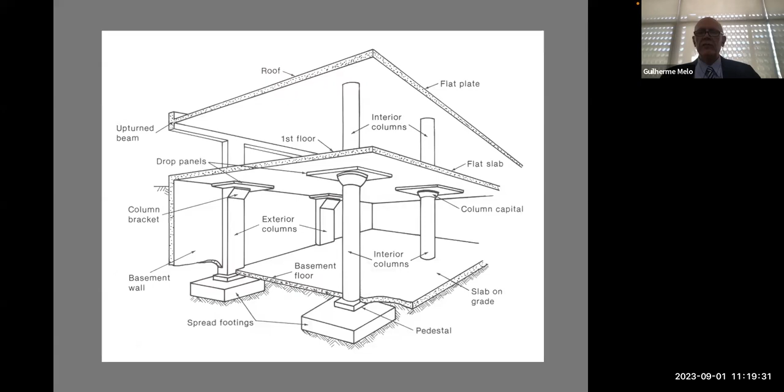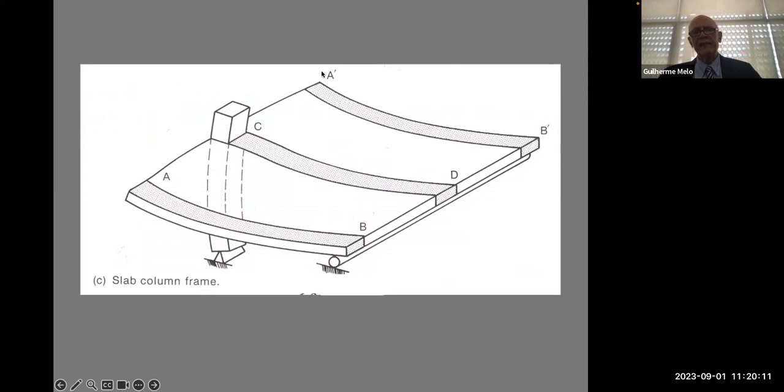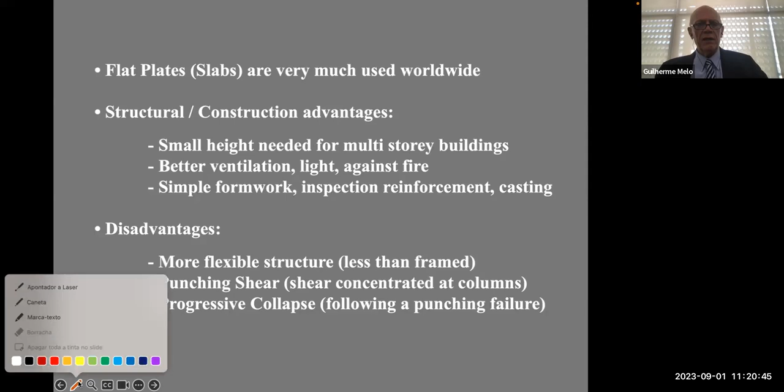Flat plates, flat slabs are very much used everywhere. They have a lot of structural and construction advantages: small height for multi-story buildings, better ventilation, light, simple formwork, they say, and it is more easy to have reinforcement before casting. Some disadvantages, of course: it's a more flexible structure compared with a frame, for example, and has the possibility of a punching shear failure.

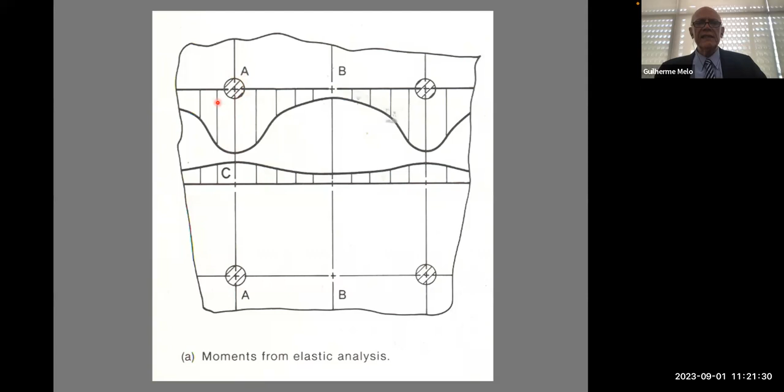And because of that, we can have some progressive collapse following a punching failure. Because of that, we should take extra care. Here is our flat plate. We are concentrating in this region here. And of course, you know, big moments in this region, and at the same region we have a big shear force. Then because of that, we can have a punching failure.

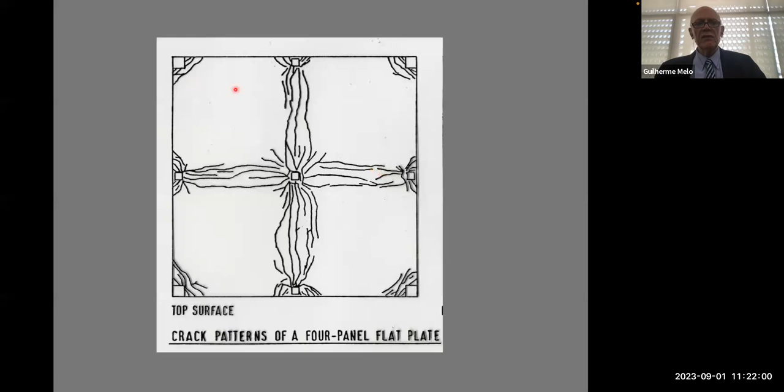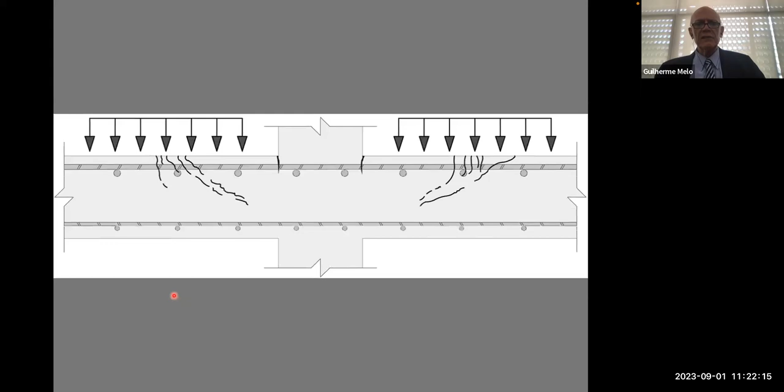This is a crack pattern from the top surface of a 9 column slab. We can have some cracking in this direction, close to the columns as well. And here we are concentrating in this region around the column. What happened basically with the loading, we have some cracking, going till failure here. And what you can see, this reinforcement here, the top flexural bending reinforcement, is very easily taken out here. And if there is reinforcement here, it can work better.

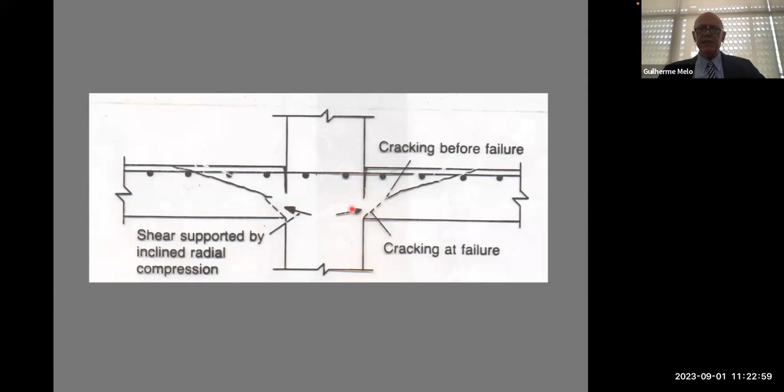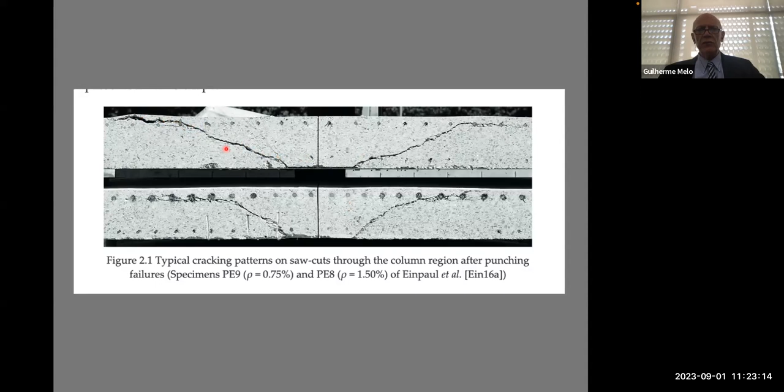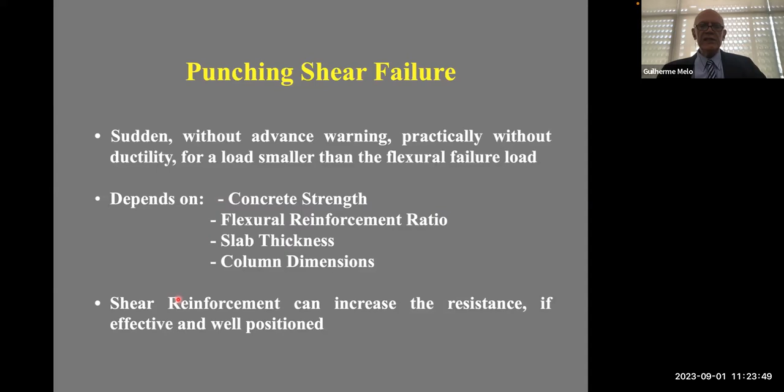Because of this, we have to saw-cut the slabs, let's say, when it's possible. Then a punching failure is sudden, without advanced warning, practically without ductility, and for a load smaller than the flexural failure load. It depends on the concrete strength, depends on the flexural reinforcement ratio, on the slab thickness, and on the column dimensions, of course. Shear reinforcement can increase the resistance if effective and well positioned.

Here is a model from more than 60 years ago, Kinnunen and Nylander, a very nice model. But of course, there were others. But until today, everybody's trying to find a good model for punching. This is a big conference from 20 years ago in Sweden.

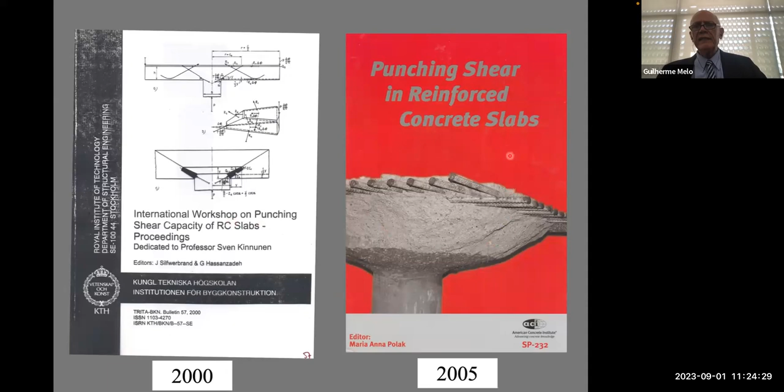Kinnunen was there participating and so on. Very important conference. Then another one in the United States, at an ACI meeting, 2005. Then another very important conference in 2017, another special publication at the ACI, honoring Professor Hawkins.

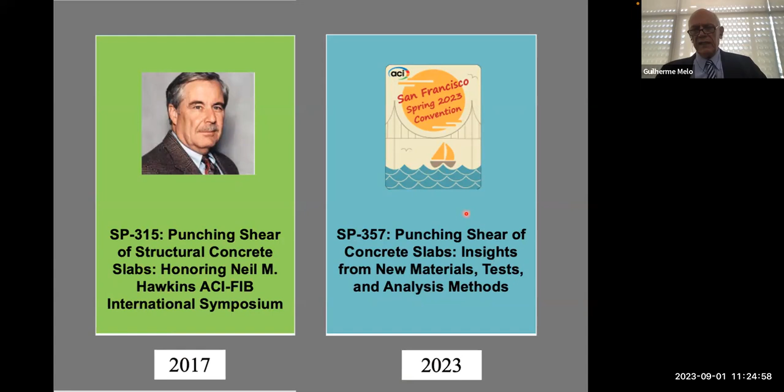Shear reinforcement - what would be the ideal shear reinforcement? Of course, effective and requiring simple and easy workmanship. Some are effective but very difficult to install. This is always important to keep in mind: not all of them are effective, nor simple, nor easy to work at the construction site.

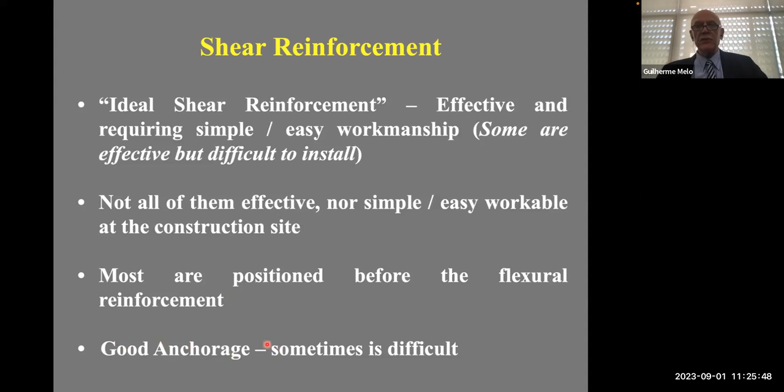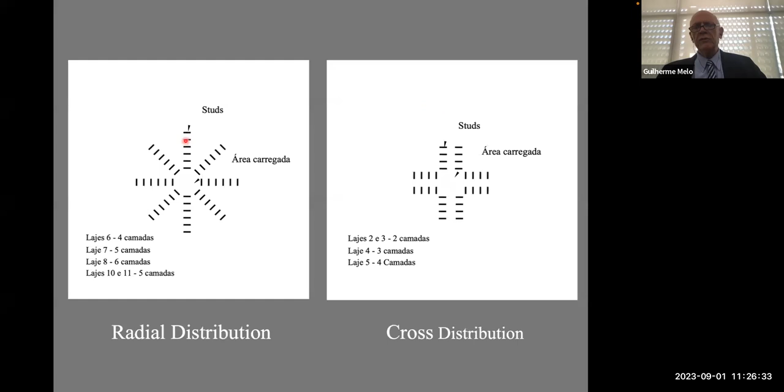And should have the correct length, let's say. Here is an example of well-anchored shear reinforcement. Of course, it can be in cross or radial distribution, with an advantage for either one.

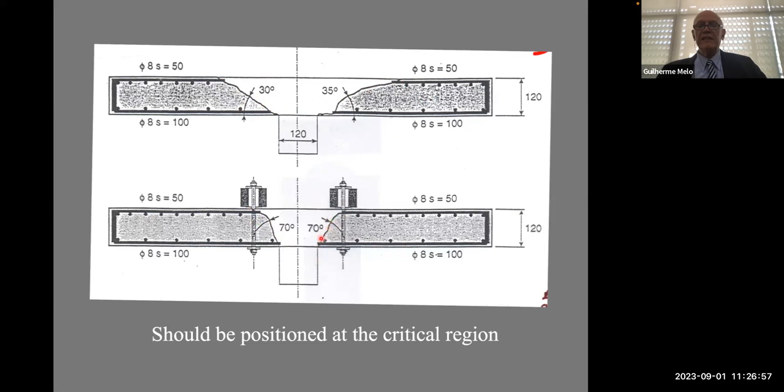What happens, of course, when you put shear reinforcement versus without shear reinforcement, is the angle of the failure surface changes. If you have, for example, a strengthening here, that would be the difference in behavior - for a higher load, but changing the surface. That's very important. Basically, we can have failure going through the reinforcement, and failure outside the reinforcement.

Because of that, all codes have a lot of checking. We should check at this surface if there's no shear reinforcement, at this surface if there is shear reinforcement - the failure could be here, could be here, or could be here. And because of this, we have...

Expressions for checking that. Interesting to note that sometimes the load you arrive at is good compared to the test you did, but the shear failure surface is not the one that was expected. On the other hand, sometimes the failure surface is what you expected from the test, but the failure load was not.

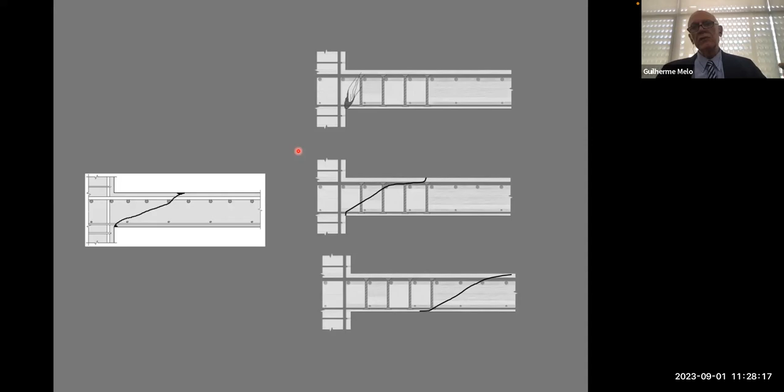In other words, we have to study much more, everybody, so that possibly in the future we can know exactly what will happen when the slab is tested.

Another important thing here would be for a circular column, how the failure surface itself should be. And of course, it's easier for us to use a vertical surface for checking stresses. We have to keep this in mind.

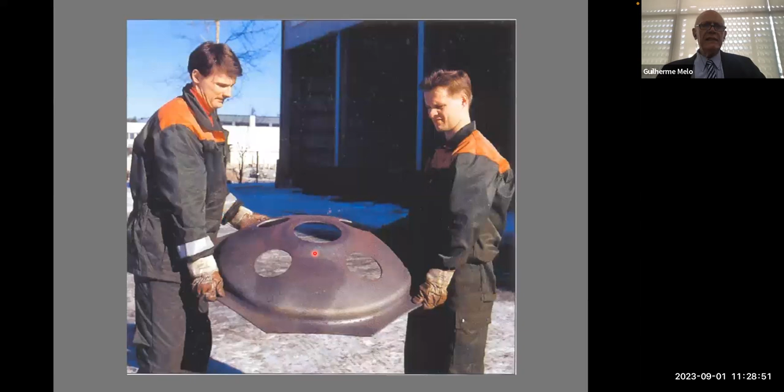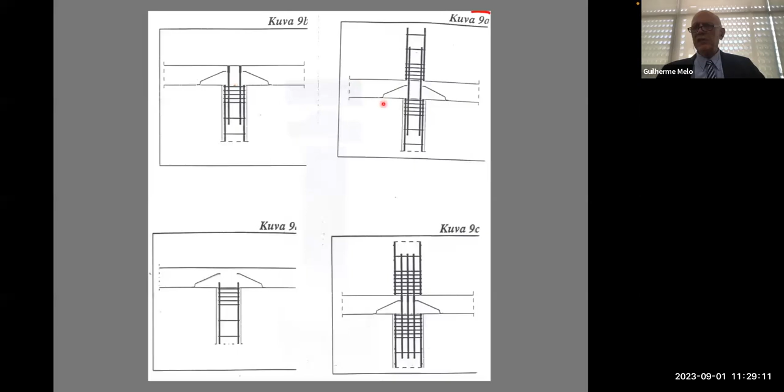Here, one interesting example from Finland is a kind of UFO, unidentified flying object, it looks like. It's important, but of course it depends on the size of the column - it will be more difficult to use. Here is the position of all the reinforcement, and it would need some necking here at the column, and all this should be kept in mind.

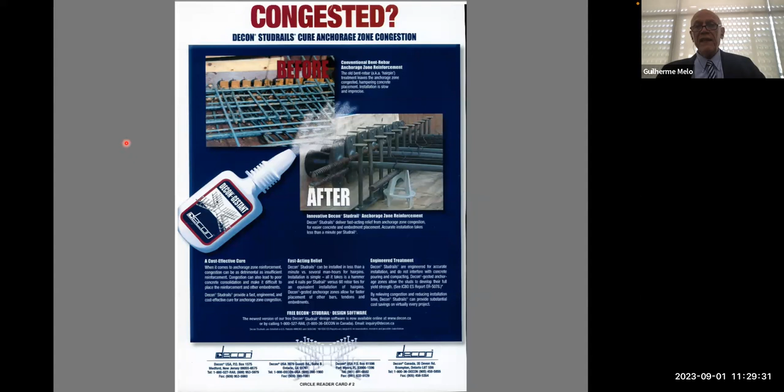And of course, this is business. Here are some adverts from Concrete International. And as we noticed, sometimes this region is very busy. Anything that can help, if it works well, could be good.

Another kind of shear reinforcement we can have - most of them, actually, to be sold, are tested and so on. We should use one that we have tested and believe works. Another one here uses shear studs, and that can work as well.

Then the more traditional ones can set a kind of standard, and say, oh, ours is best, and so on. That's very important - yes, when you believe, you trust.

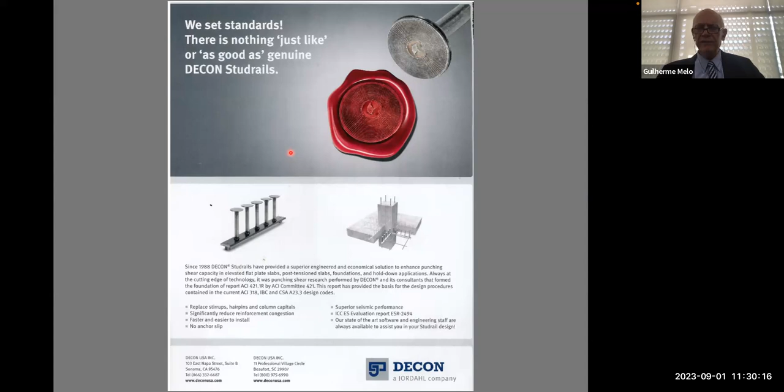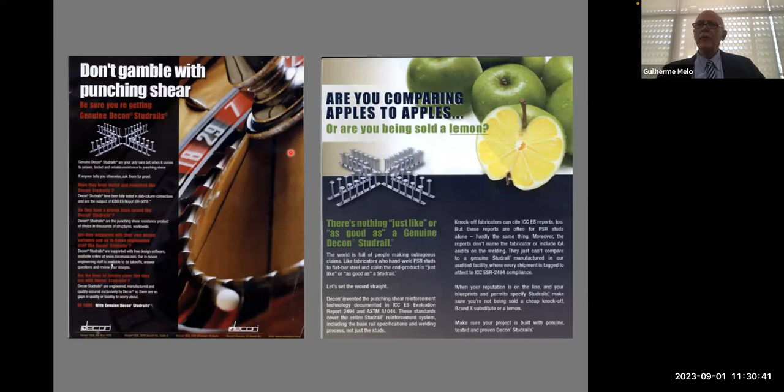And I like this, because we can't gamble with anything in structures. Sometimes people try to save money by lightening the structure, and that's not a good idea. If we want to save money, we should save elsewhere in the construction, not at the structure. The structure should be sound.

Another good thing is to think about post-punching and progressive collapse of slabs. Progressive collapse is the propagation of a failure that occurred originally at a small part of the structure, and the result is disproportionally bigger.

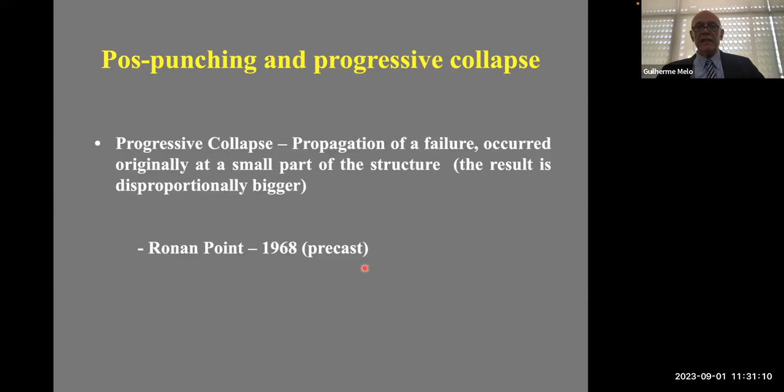One early morning, a lady was having tea. She hadn't noticed there was a gas leak, and then there was like an explosion. She was on the 18th floor, and all the kitchens came down because it was so early. Only 4 people died in this. I say that because if it had been 2 hours later, much more of a problem would have happened.

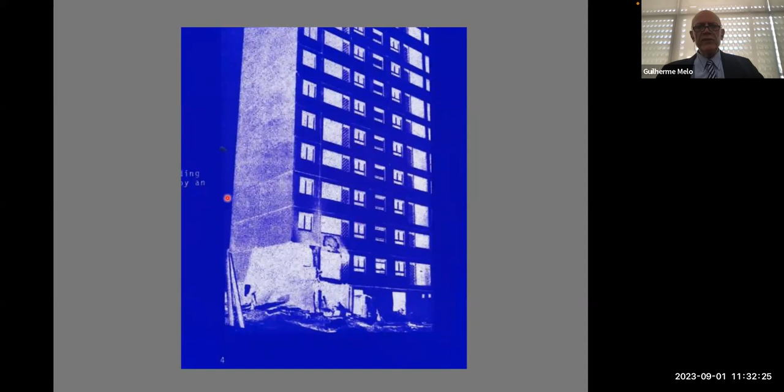Of course this is precast, and I like to show this because this was not gas leaking - this was a bomb. But the building could stand for some time, and that's important, of course.

And what are the most susceptible structures to progressive collapse?

Precast, as you have seen, and flat plates. There are a lot of examples here, some only from the United States, but we have examples everywhere. Everywhere that has problems can have progressive collapse. And we're going to show here...

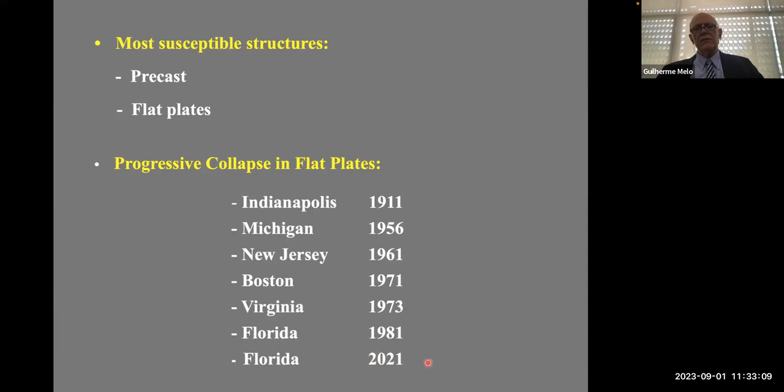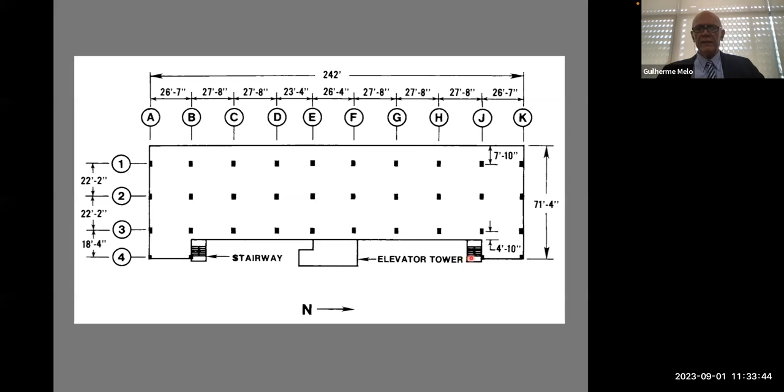This happened in 1981 in Florida, and of course there was one three years ago, very close to us here. In 1981, it was this one in Cocoa Beach, Florida, close to Orlando. This building was under construction, and it was a very well-behaved structure in a way, all framed, almost equal spans, with an elevator tower, staircase, and so on. There was a punching deficiency at one of the connections, found later.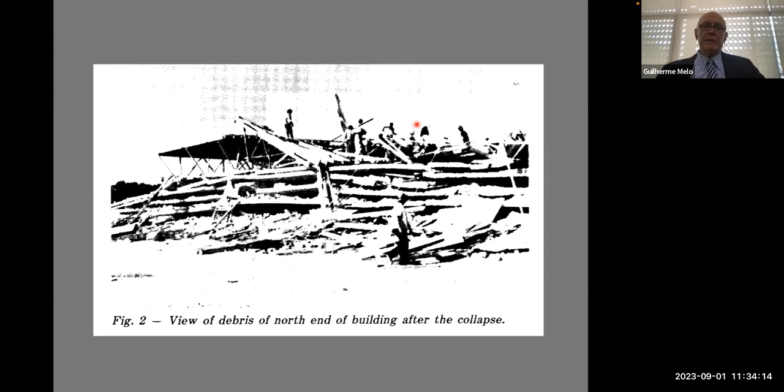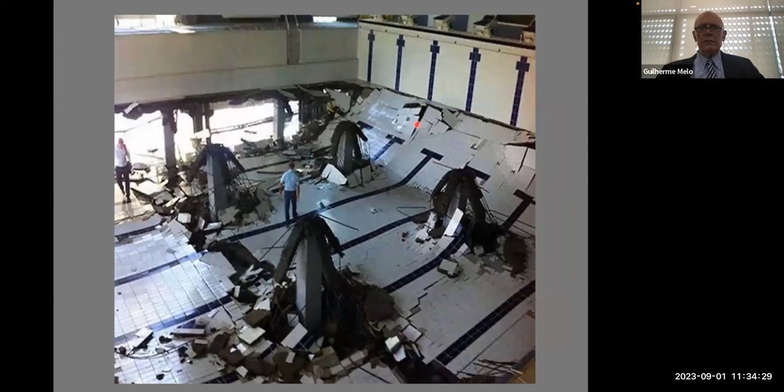And other examples of punching failures. You can see what's left usually from that. It was in Portugal, another example. All of those pictures I took from the internet. It's very easy to find punching failures and progressive collapses.

Another one here, you can see what's left after a punching failure. You can sometimes see a failure rupture cone here, and some bars just hanging.

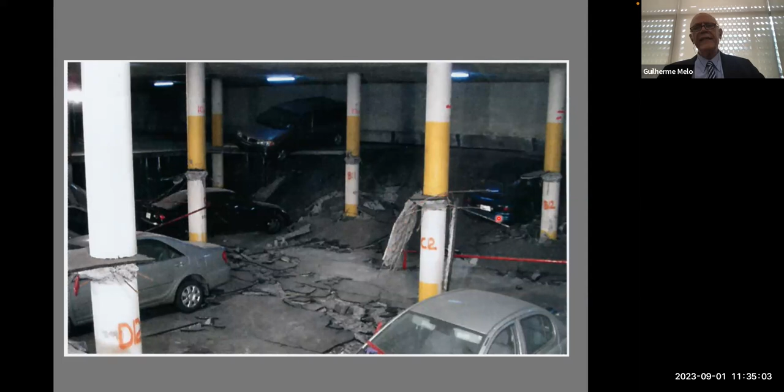What could trigger a punching failure and a progressive collapse? Of course, bad design, bad construction sometimes, bad detailing, insufficient punching capacity. Sometimes it happens at construction time, due to construction loads. The materials could also not be what was specified. And of course, overload. All of this can trigger it.

We know that most collapses, in general, don't have only one reason. Most of the time we have some punching capacity not at 100%, some construction issues, some deterioration with time.

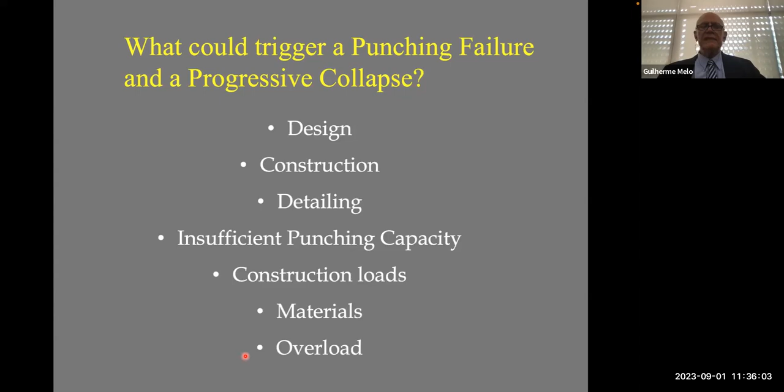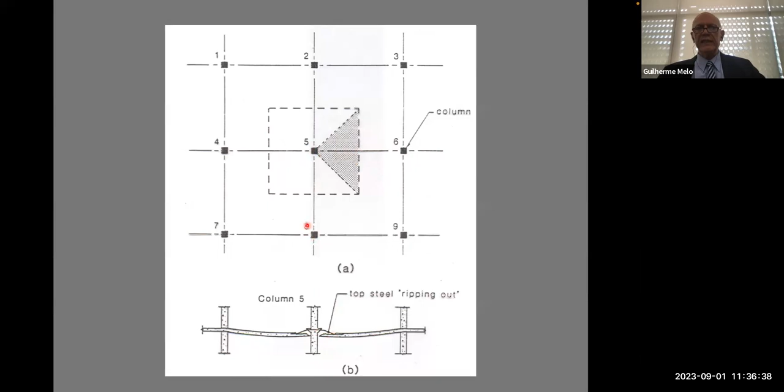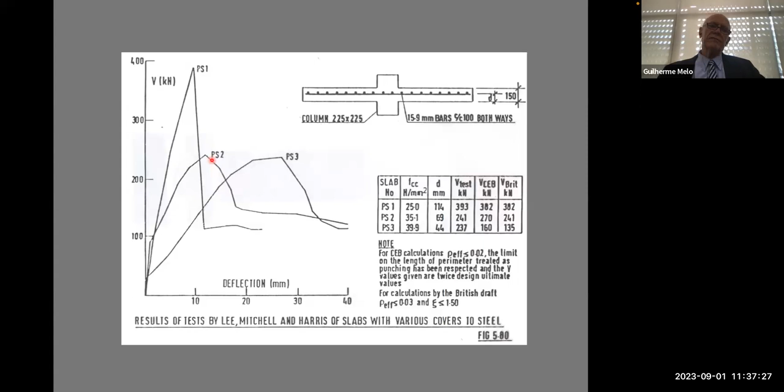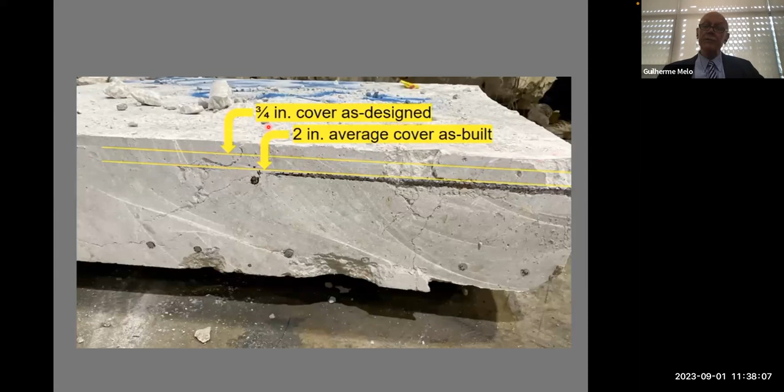Here is a more recent one, from three years ago, as you know better than me, which I found on the internet. Of course, they are still investigating, but this picture shows the cover as designed for the reinforcement, one of the bars, and this on average was much more than what was designed. Of course, this could be one of the reasons that helped trigger it.

What would be the aim of a structural design, as we know? Of course, to minimize the risk of a progressive collapse—in other words, containing the structural failure. We all want structural integrity, strength, ductility (important), and of course an alternative load path. Sometimes in some structures, you can even design for that.

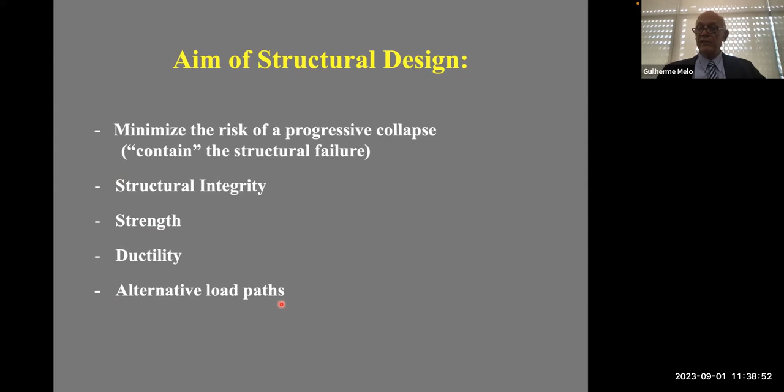What is the problem that happened here? There is an alternative load path, and this is important, because in some structures—would be for all of them—we don't want surprises.

What happens in post-punching in flat plates? As we have seen, post-punching resistance is low, with total or partial failure of the connections. Sometimes you can have 10% of the load still hanging there, 20%, or nothing, as we saw. Load and bending moments are transferred to neighbor connections, and horizontal and vertical propagation of the collapse happens. For flat slabs and plates, punching failure is usually the main cause, and it occurs with little or no warning.

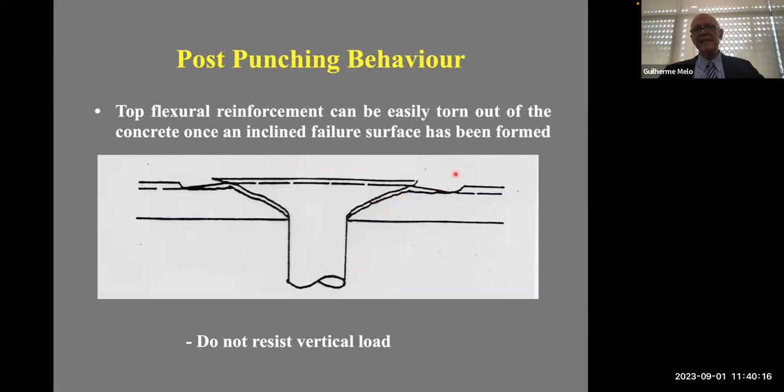It's very important to take care of that. In post-punching, the top flexural reinforcement can easily be torn out of the concrete once an inclined failure surface has formed. As you saw, this top reinforcement is vital for punching resistance and for the flexural behavior of the structure. After punching, it's easily torn out, as we saw, and it does not resist vertical load.

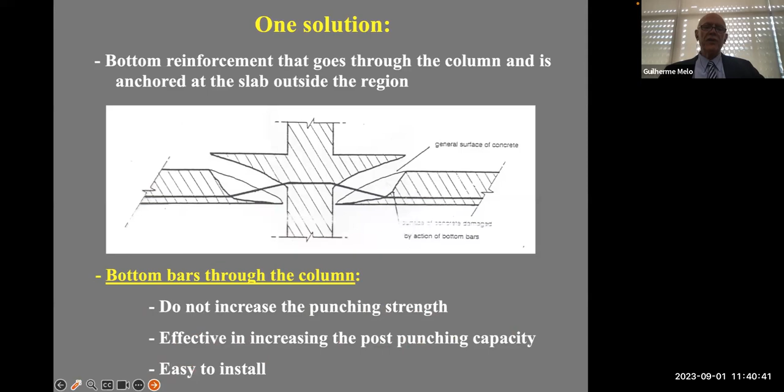One solution is bottom reinforcement that goes through the column, inside, and is anchored outside. These bottom bars do not increase the punching resistance, but are effective in increasing the post-punching capacity, and they are easy to install—easy compared to other heavy solutions.

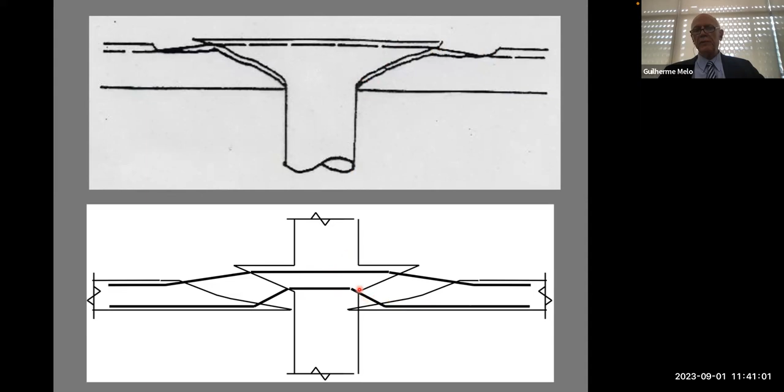We can see here that the top reinforcement is not good for post-punching, but the bottom reinforcement could help. This compares a slab without bottom reinforcement and a slab with bottom reinforcement.

We can have here, in this case, some 70% of the previous load. Sometimes you can have bigger values. And of course this is important because instead of all this load going to neighbor connections, we can diminish that.

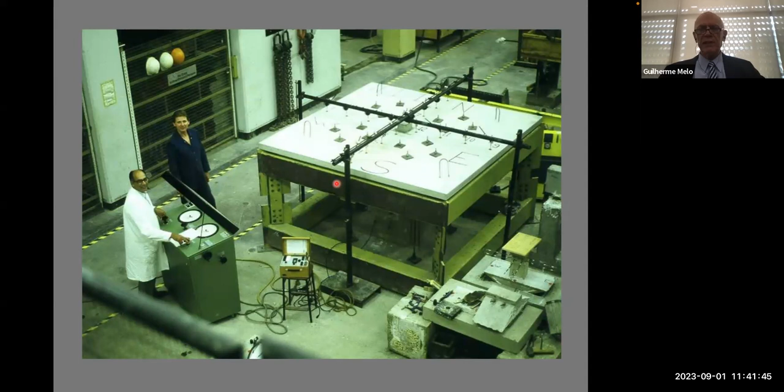Here is just a picture to remember the test I did more than 30 years ago in England, to try to understand this and help a lot of people in the world. We tested that, and you can see here the top reinforcement, out of position, and so on. Then let's talk a little about what has been done in Brazil.

I'm going to show first the FRP work, because I know most students here, Professor Nanni, are interested in that. We did some GFRP internal reinforcement beginning in 1997, some external bonded CFRP shear strengthening beginning 2000, near surface mounted beginning 2005, strengthening flat slabs in 2014, hybrid strengthening beams in 2014, and tried to find the resistant parcels of shear reinforcement later.

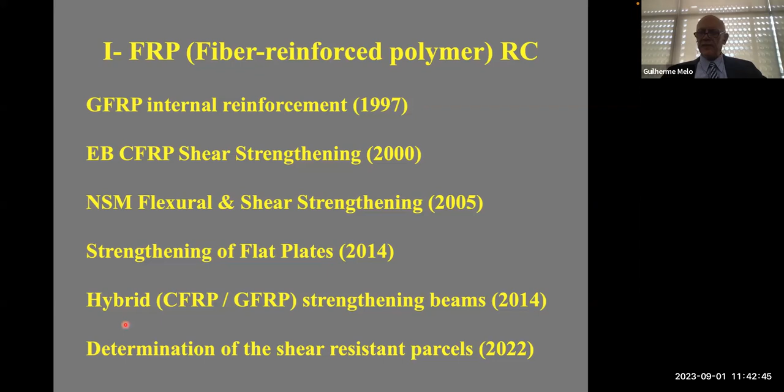I should acknowledge here a lot of people, because this was a guy very important. He had a company here in the United States and sent us a lot of GFRP bars in 1997. Then Professor Sam Rizkalla from North Carolina State University, he has been in Brazil and hosted two PhD students of ours, and sent at that time a lot of material we could test there.

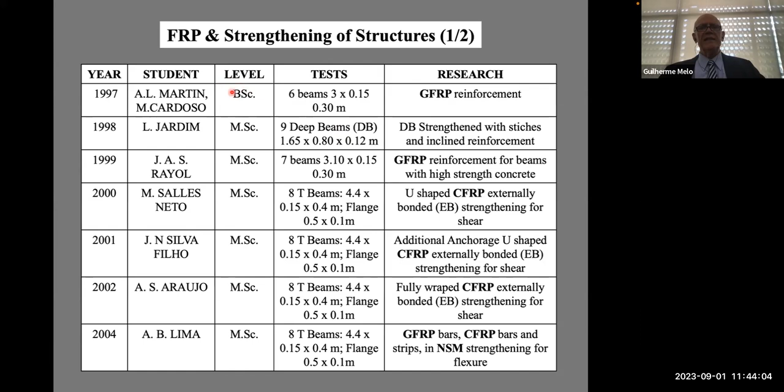This is some conferences I went to, in Structural Faults and Repair. These are the list of some of the works we did, beginning also with an undergraduate student, then some master students, then some PhDs, and so on, and the research they did.

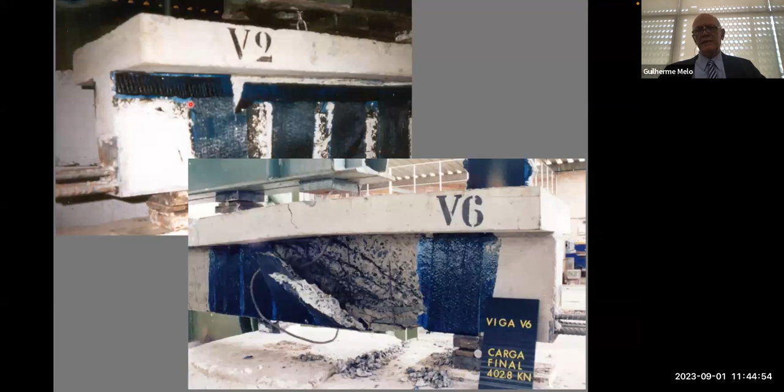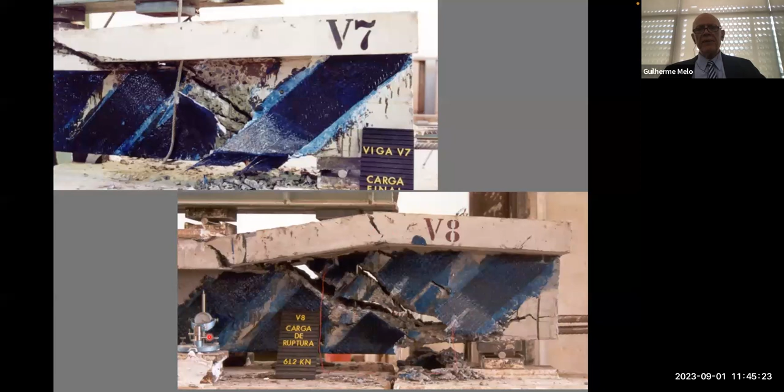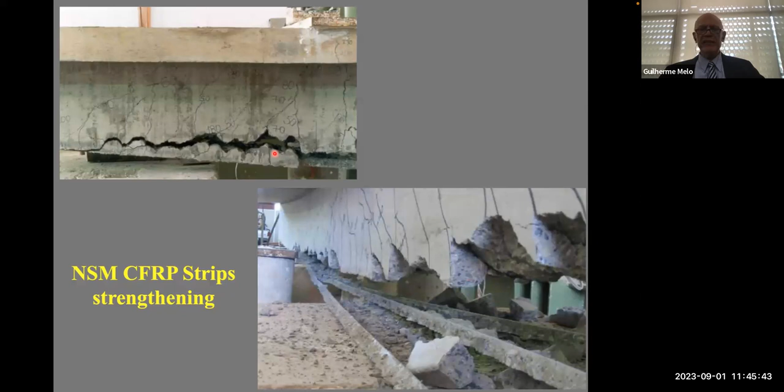Then we did some NSM with CFRP and GFRP bars, and so on. Here were some of the failures we had, for the CFRP strip strengthening, for the CFRP bars, and for GFRP strengthening. It's very interesting results, as you know. We have published most of these results.

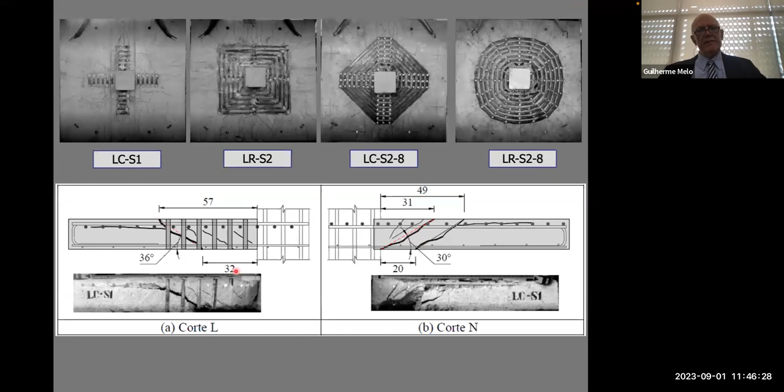And this flat plate strengthening with CFRP fabrics, yes, and this is some of the layouts we used. Here, two examples of the failure surface. And then let's show now some punching shear without FRP results.

That's actually what worked more. We did a lot in reinforced concrete with stirrups, shear reinforcement, rectangular column, openings, holes, unbalanced moments, etc., and some with pre-stressed concrete as well.

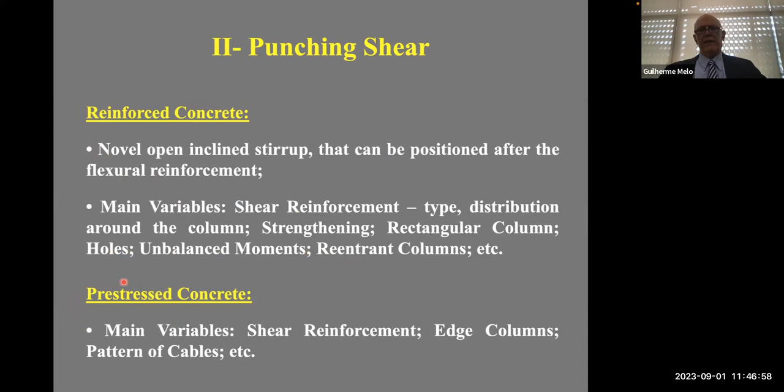We have here, of course, to acknowledge a lot of people, some internationals. Professor Paul Regan was my supervisor. He passed away unfortunately last year, and he helped us a lot. He went to Brazil many times and hosted four PhD students for a year. Most of the good ideas, let's say, were thanks to him.

I should acknowledge him. Professor Vollum from Imperial College hosted students as well and helped all these years. Professor Muttoni from EPFL in Switzerland, Lausanne, hosted one student there. Professor Miguel Fernandez Ruiz hosted students as well, has been in Brazil, all these people, and we have talked and interacted a lot. Professor Walter Lúcio as well was very important since this time.

Of course, as a lot of the Brazilians as well, some of them my ex-students, some colleagues at the same time working together. Because of this we could have a lot of work, let's say, that could show. And I have to acknowledge all of them.

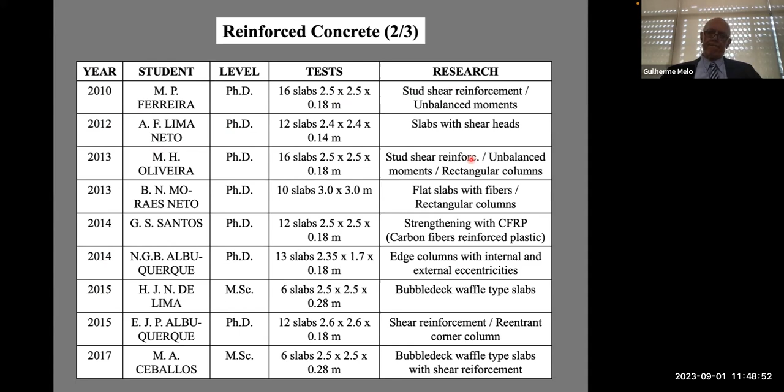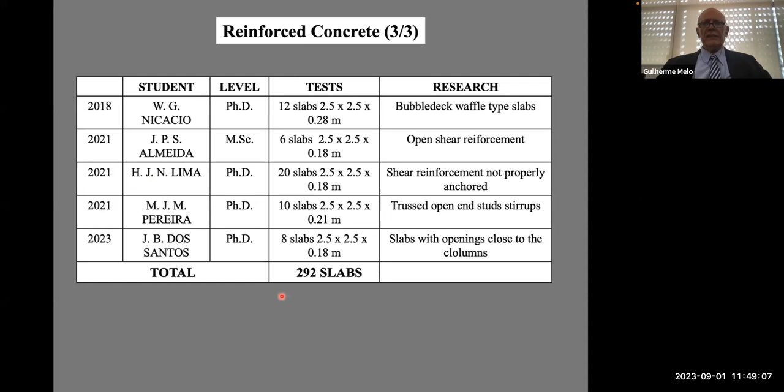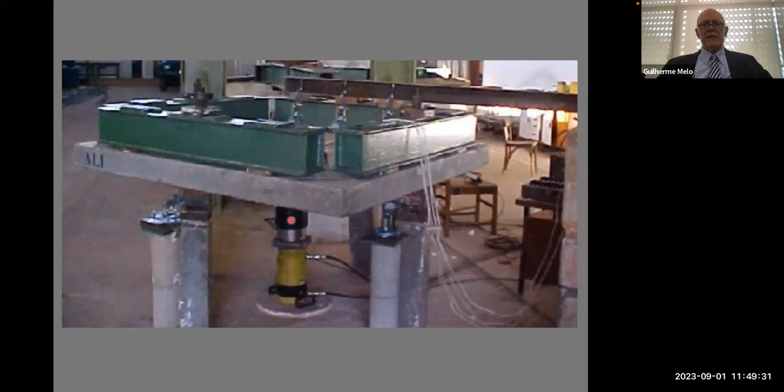And we did some punching as well. I like this picture because of how we began, you see, very simple test, just holding here and a simple check, pushing the slab. This is the kind of things we had at that time. At the beginning, here's a manual pump.

Then, of course, sometime we had some frame, a good frame, quite big actually, and quite strong, because we apply different moments. It has here a kind of helmet that has to hold the column down, and you can apply the moments.

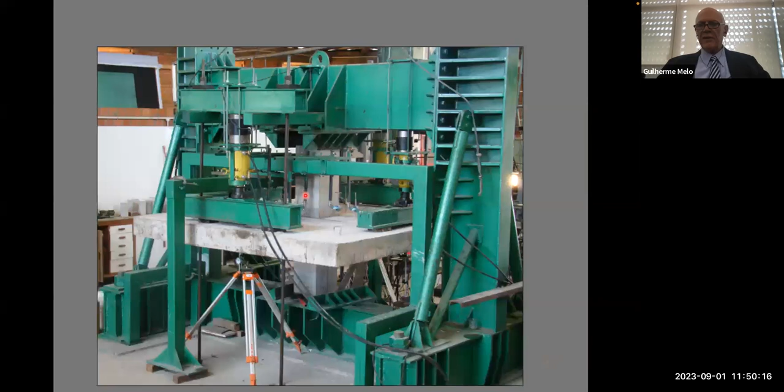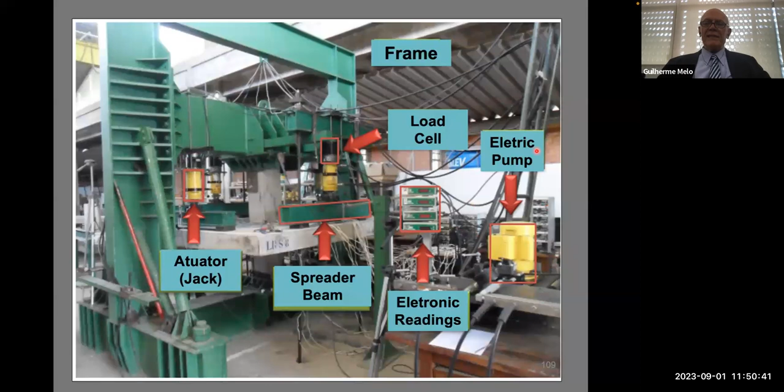Here, a closer view of the frame we have for some time there. And here, of course, you can see the jacks, the actuator, some spreader beams, some electronic readings, some load cells, and we have an electrical pump. It's not the last type, let's say the most modern, but it works.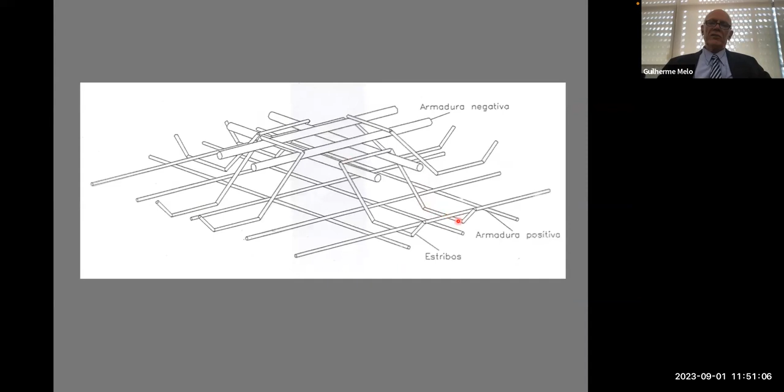One of the stirrups we have worked, we have tested, a kind of open one. Here you can see more easily, it is well anchored on top of the flexural reinforcement and goes down to the bottom of the slab. You can see here a picture.

It goes up here, goes down and goes here. It can be applied after the top reinforcement is in position. This is very good, but of course we have to guarantee that it can be well anchored, because if it stops here, of course we will have a problem. And it should be at the right position, as you have seen.

Here's one of the slabs to be tested in another place. Here is one of our students, and this is Professor Ronaldo Gomes, also supervisor of the student. And quite a big slab here, 3 meters by 3 meters by 200 millimeters thick. Of course, we know the importance of being well anchored, the reinforcement, the shear reinforcement.

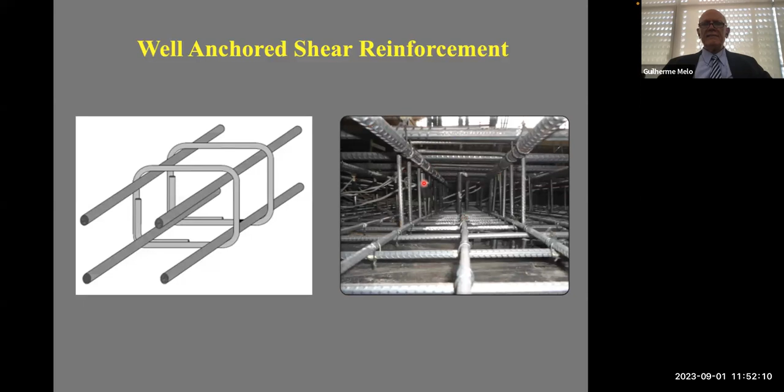Here is a picture. But what happens if it's not well anchored? Why are we worried about this now, studying this? Because, of course, this is against good practice, but it can be used as a support for the top flexural reinforcement. And because of this, people are using a lot of this. Top flexural reinforcement becomes easier. It helps grouping series of shear reinforcement.

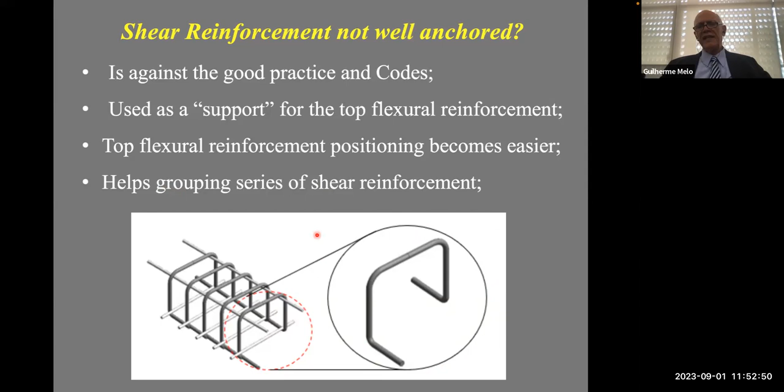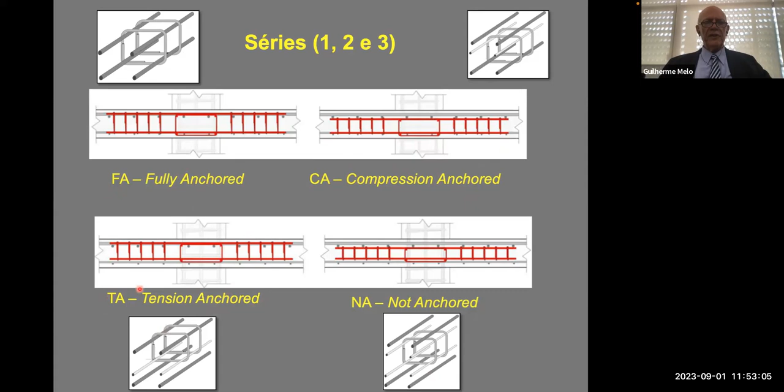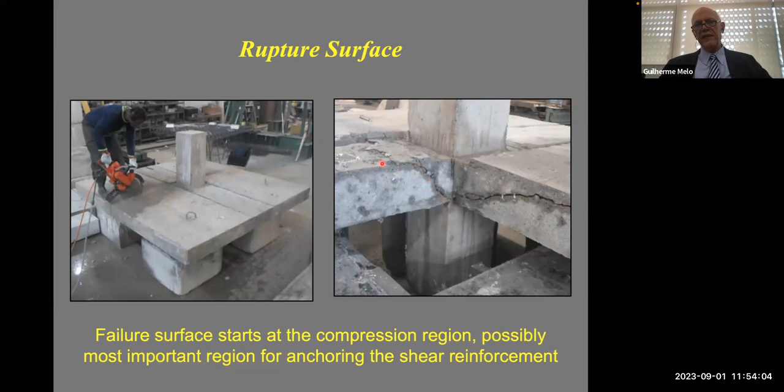Of course, this should be very carefully studied. Anyway, here it's important to see, as I showed, the cut saw. It's very expensive after the test to cut this, as you imagine, as you have done, but it's very important to do that. Then you can see how the failure surface was on the two sides there.

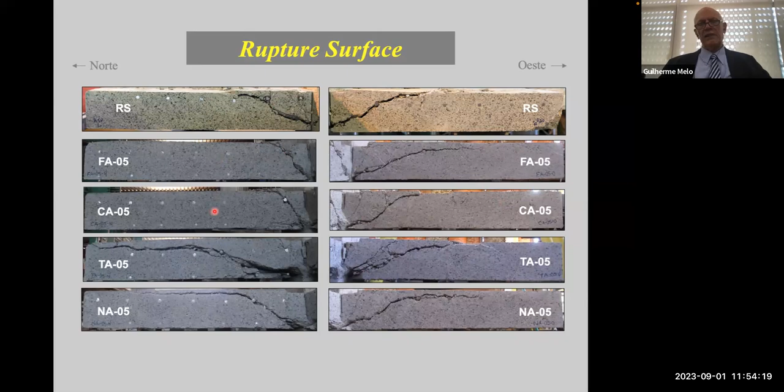And then, of course, we do a lot of slabs and have a lot of parameters that we test to investigate, and then we try to make sense of the conclusions, how it behaved. Here is a better view of the rupture surface.

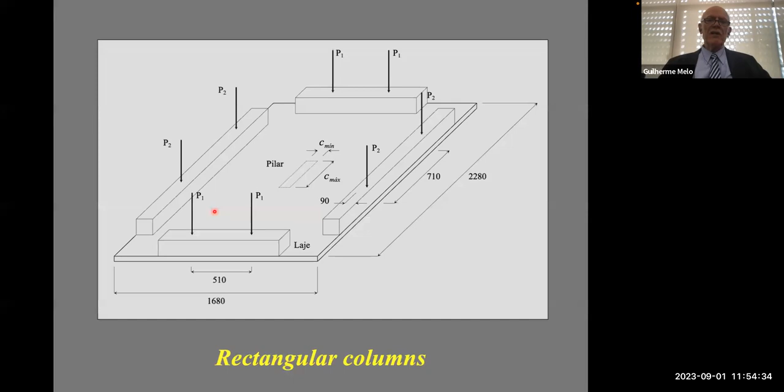We did some for rectangular columns as well. At the time, this was the first PhD thesis, 20 years ago, by Daniel. Everything was manual at that time, even, but it worked. We have an ACI and another published paper on that, and the results were very good. Of course, being cut saw, and then you can see the difference, how it behaved. This student did 15 slabs.

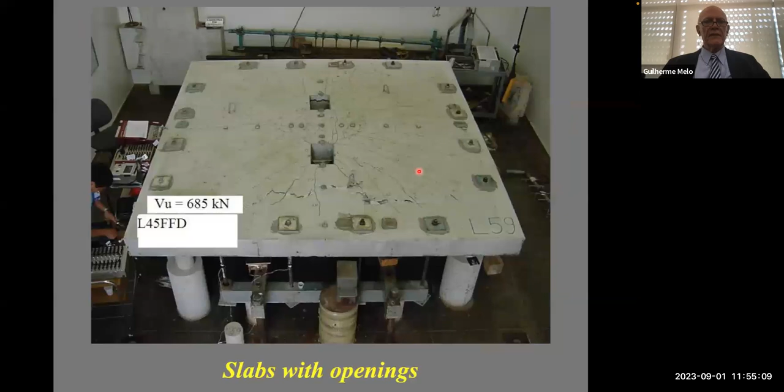Then holes, openings in slabs, very important as well. Some of the shear reinforcement we used here. Some capitals we did as well.

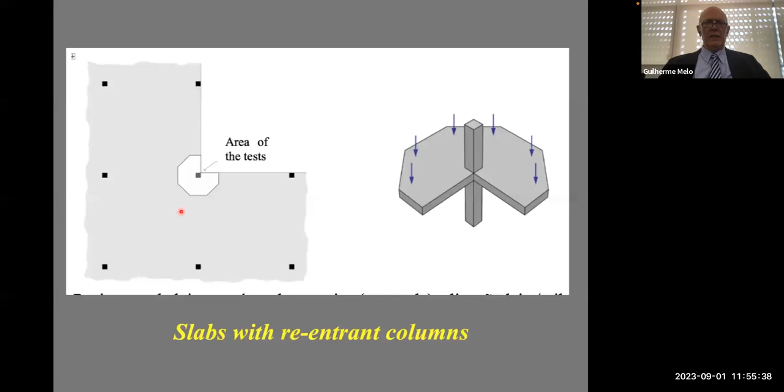Now we did some tests. I'm doing again now some tests with re-entrant columns, how this would behave here. Professor Miguel Ruiz is helping us there with analyzing these results as well. And it's very important. Here's the model we tested.

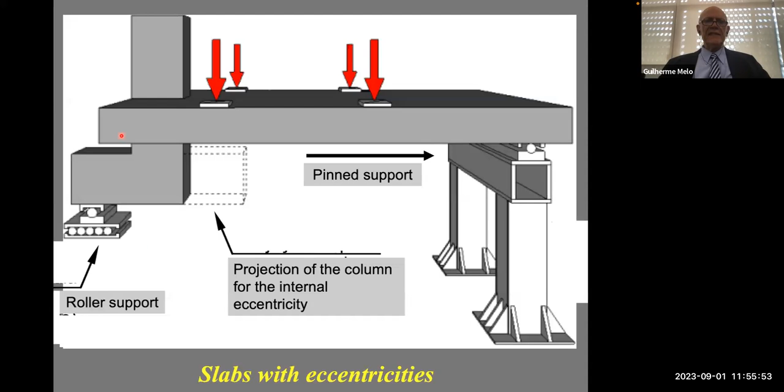And here are some of the results, very important. And then some with eccentricity, how it worked. It's very important as well. Some bubble slabs, bubble deck slabs we tested, pre-stressed.

I'm rushing because the time is going. Here, preparation of the slab, studs, pre-stressing. Pre-stressing in the lab is very different, it's very difficult to do, and very dangerous. We should take very great care.

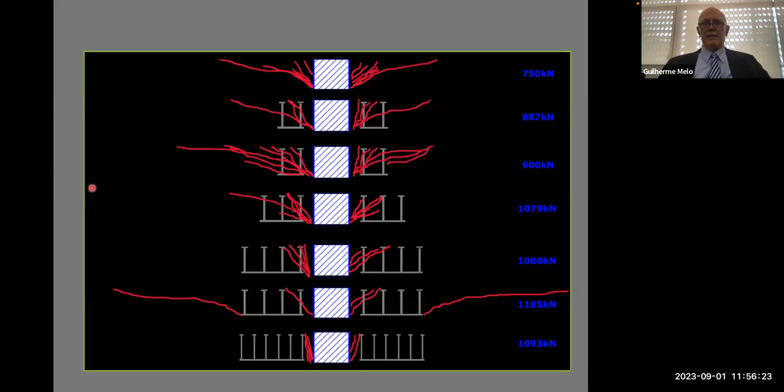Some failure surface and some results. We did some for edge columns as well. We did some numerical analysis.

And to conclude, I would say that research on punching shear and on FRP strengthening, of course, will continue. I will be around for a couple of years, maybe, or 5 years. But of course, a lot of people are continuing that. New materials